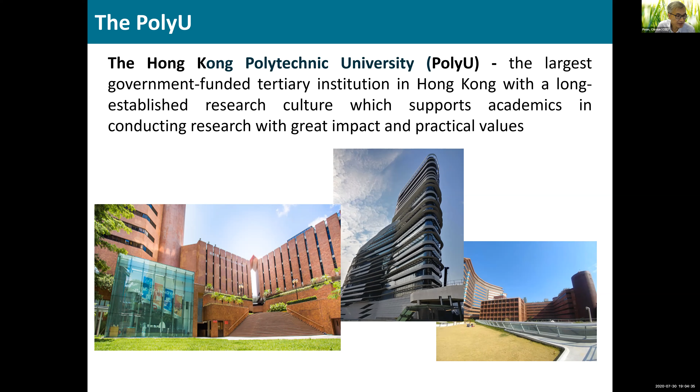Okay, a little bit about my university. We are in the middle part of Hong Kong. Hong Kong is a small place, 7.5 million people, perhaps. It's very crowded. We are right in the middle of the city, and we are one of the government-funded institutions. And in terms of civil engineering, we are ranked number 19 in the world in QS ranking.

So we work on structural engineering, environmental engineering, material, hydraulics, geotechnical, and we have about 45 faculty members in the department and about 200 PhD students and another 200 research or postdoc and things in the department.

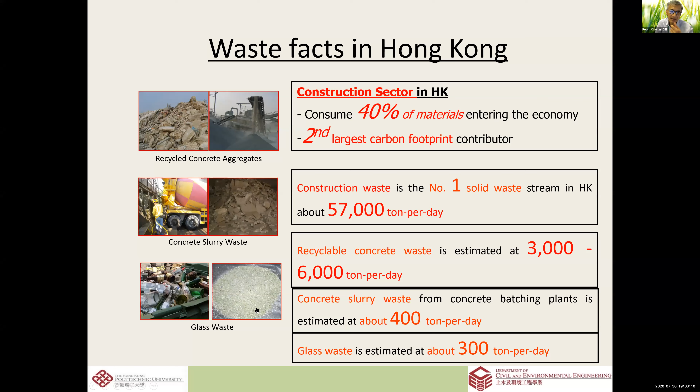The other is glass. People tend to drink a lot of wine and glass-contained beverages, and that is a major problem as well. So C&D waste comes from every part of our activities, roads, which you have. If you are using asphalt, of course it's asphalt. If the pavement is concrete, then there will be concrete waste.

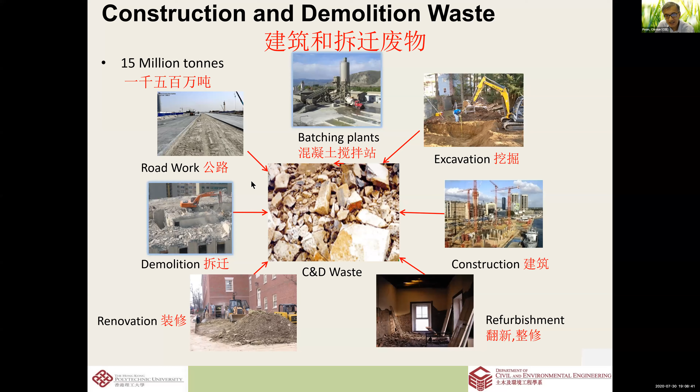And then demolition, as well as construction, excavation, and batching plants produce different categories of C&D waste. And when it's sorted and crushed to different sizes, it can be used for applications like a subbase in roads, for example, or in concrete products.

But of course, C&D waste is very different from natural aggregate because of contaminations like timber or plastic, but also what we call the attached mortar, because in the crushed concrete, besides the natural aggregate inside, there's also the old mortar.

Old mortar means the hydrated cement paste. And this makes the property of what we call recycled aggregate very different from that of the natural aggregate because of this very high water absorption.

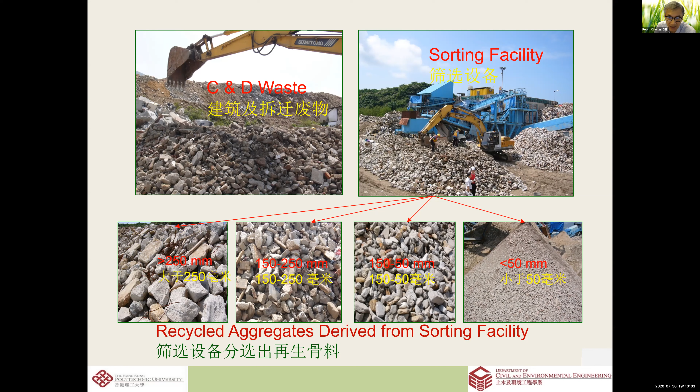For this recycled material, when we have a scarcity of aggregate resources, we can use it. Particularly in our part of the world, we are lacking landfill, and when we dump this in landfill, it is an environmental burden. And also we are running out of aggregates. So recycling is promoted in our part of the world.

The very basic one is to turn this into blocks. Without any treatment, you can crush it to a certain particle size, fulfilling the limits in an ASTM standard, or in Hong Kong we use British Standard, and when you comply with the standard grading curve and the strength of aggregate is strong enough, then you can use it for producing blocks. These are the paving blocks used in walkways, and this is quite easy.

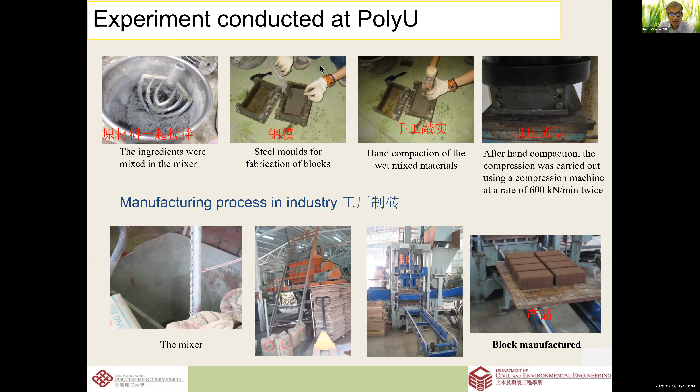But what we try to do is to make it value added, and we have 3 generations, 4 generations now. The first generation tries to use as much recycled aggregate as possible to substitute natural aggregate. This is the most primitive type; as long as it complies with the grading as well as some strength requirement, it can be used.

The second generation, because we are also facing a glass problem. With the use of recycled aggregate in the blocks, although it meets the strength requirement, it increases the water absorption because the recycled aggregate contains a lot of old mortar. Increased water absorption means the blocks easily get dirty, because it takes up a lot of water, so when used in pavement, it takes up a lot of dirt as well.

So we try to also use recycled glass, which is what we call hydrophobic. It does not absorb water, and it also produces some aesthetic effect. Glass itself is shiny under light. And it is strong enough for use as recycled aggregate.

So we made the second generation block to have recycled aggregate and recycled glass together. This contains about 70% of recycled material in it. It lowers the water absorption, making the block more durable in a sense.

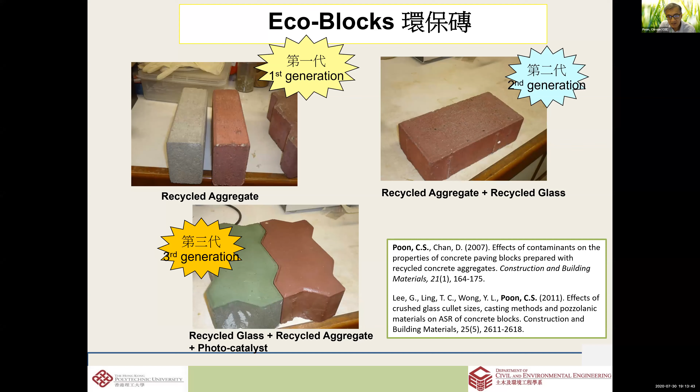The photocatalyst is nano TiO2, and with the photocatalyst it is able to convert NO to NO3, and that reduces certain air pollutants. This is done in the lab and this is done in the factory.

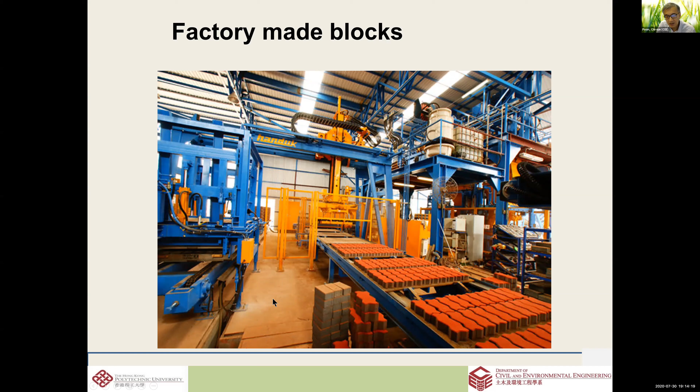We have produced the mix design, we have characterized all the engineering performance of this material, and after a lot of demonstration, the government accepted that and changed the spec, and now all three generations of block are commercially produced in Hong Kong. Of course, the third generation is a little more expensive because of the photocatalysts. These are used very commonly nowadays in Hong Kong.

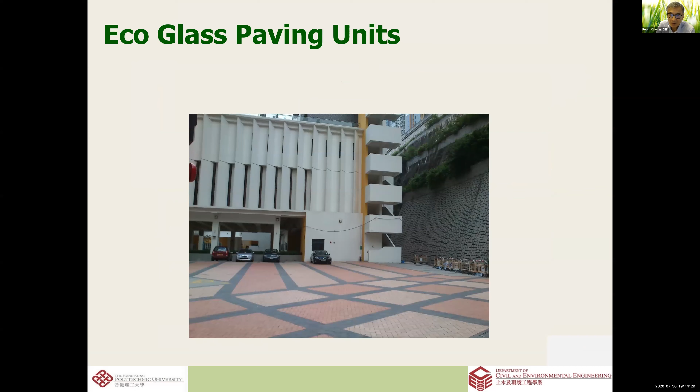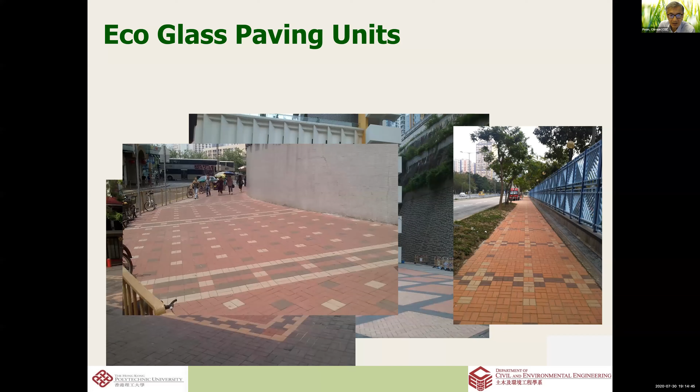So this has the concept of recycled material as well as value added aesthetically with the glass, as well as the photocatalytic reaction with the TiO2. So why do we want TiO2? I think Professor Rosell is also working on TiO2, and it's because of the air pollutants.

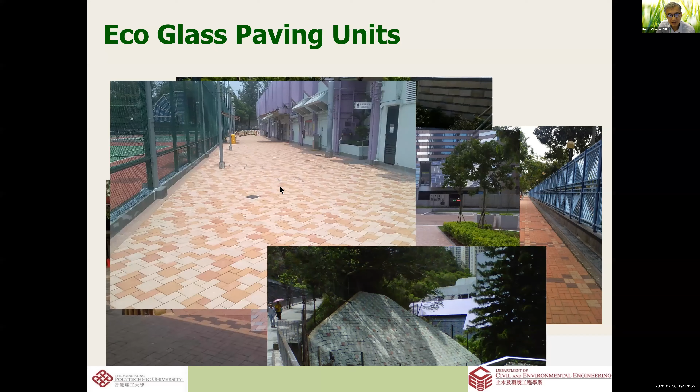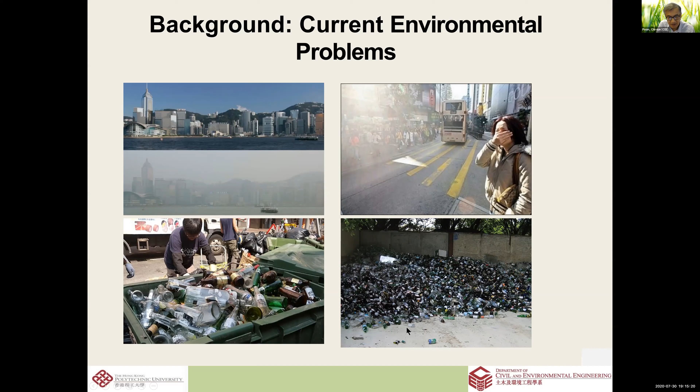This is Hong Kong. It's very beautiful sometimes, but it has nasty days, like this smog. This smog is caused by ozone, and NO partly contributes to it. Hong Kong is very crowded, and with the vehicles, the air pollution is quite severe. So we have the waste glass, as I said. So the concept behind the third generation of eco blocks is that there are two layers.

Base layer, we try to use as much as possible recycled materials, recycled glass and recycled aggregate, to provide the mechanical properties. The strength of this is up to 60 megapascal. This is suitable for use in pavement for vehicular access, and the recycled material content is up to 50 to 60%, and this provides the strength.

Recycled aggregate, of course, has to meet certain criteria, and recycled glass has the concern of ASR, but we have addressed that, as I said. If you're interested, you can go to these publications. But on the surface layer, we put TiO2. TiO2 is a nanoparticle material, and it has the ability to convert, not remove, but convert NO to NO3, and NO3 can be washed away.

In our development, we put glass on the surface layer as well. The glass is 5 mm, particularly clear glass. The glass could allow the penetration of sunlight into the deeper part of the surface. For example, when we have TiO2 only on the very top surface, the area that could be contacted with the air pollutant is quite limited, because some TiO2 is embedded underneath the very top surface.

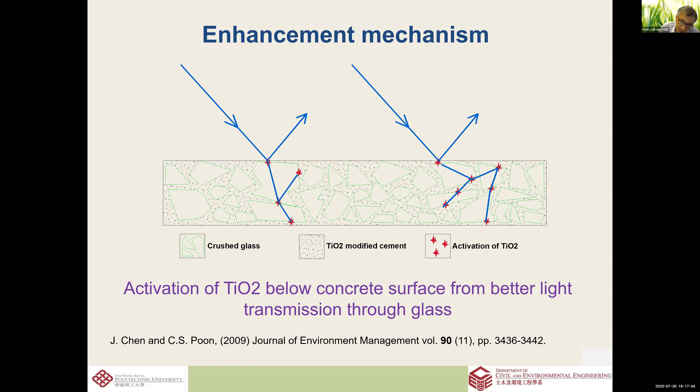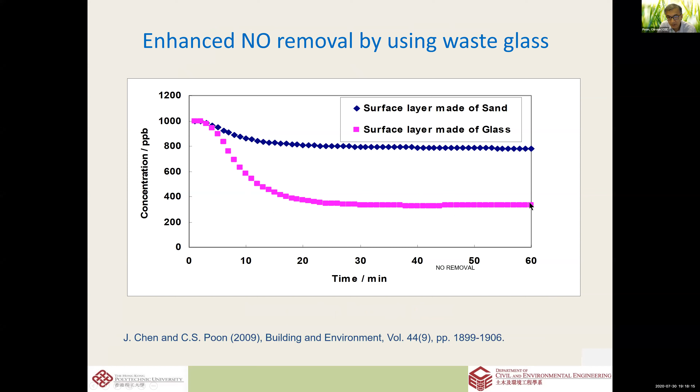So this is to show the surface layer without glass. This is the surface layer made with sand. This is the surface layer made with glass, and that is the photocatalytic removal. This is 1,000 ppb. In laboratory conditions, it's reduced to about 300 ppb. This is 70% removal for this particular sample. So we are very happy with that, and then we tried different types of glass color.

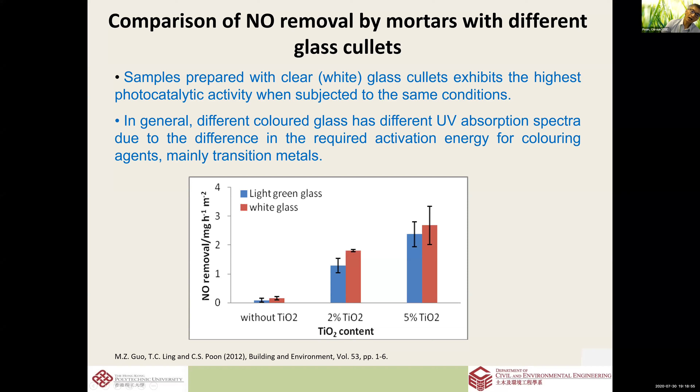As I said, the lighter the color, the better, because it allows better penetration. It will not absorb too much of the UV or the sunlight. Without TiO2, there's no removal. With some TiO2, there's some removal, and different colors of glass on top have different removal ability. So definitely the glass does affect it. The white glass, that means the clear glass, is the best. And this is NO removal.

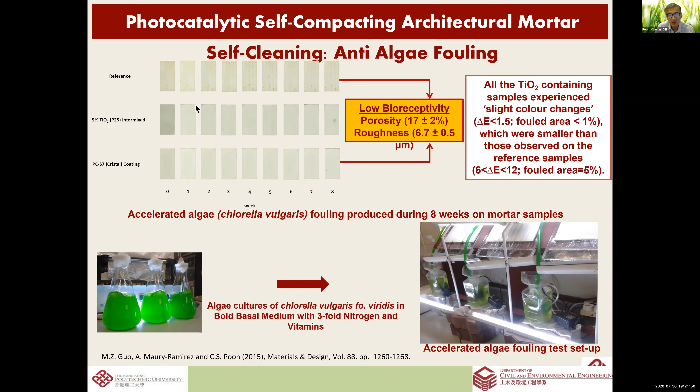And this is the antibacterial property with E. coli. This is in the dark, this is without TiO2, and that is with a particular TiO2 coating that after about 2 hours kills all the bacteria, under certain laboratory conditions. We published this some time ago. E. coli is a bacterium. The virus is not a bacterium, but it may work; nobody knows. So whether it will work, we'll wait and see.

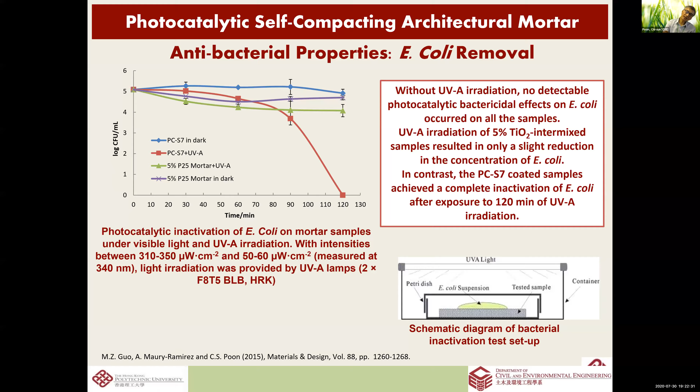So this material is being used in Hong Kong, at a particularly prestigious site in Hong Kong. We call it the Zero Carbon Building. It's a demonstration of the green building concept. It's a model building with photovoltaics. They have a biogas generator inside, and a lot of control on energy efficiency inside.

If you do come to Hong Kong, you are welcome to. You should go there for a look.

And in the foreground they put the eco blocks, the third generation eco blocks, there. So it's quite clean. We also developed different coating methods with TiO2: spray coating, dip coating, and intermix coating, with different efficiency, and the amount of TiO2 ranges from very little to very high, and the efficiency could be quite similar.

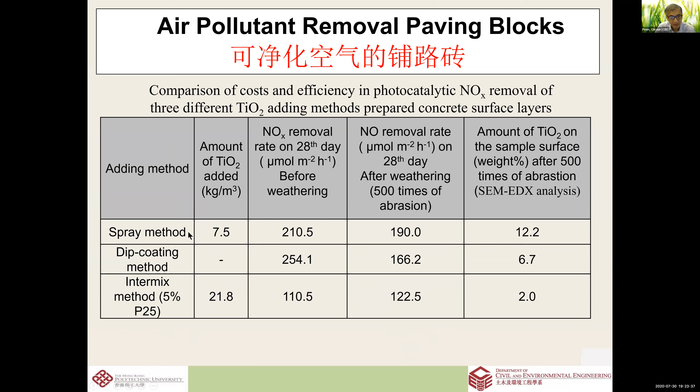So I think we are very happy with this particular method. I think we published this paper as well. If you are interested, you can search for it.

Now, we go back to the main topic of today, which is CO2. Why are we interested in CO2 curing? Because of concrete. If you're a concrete person, you know hardened concrete is hydrated calcium silicate hydrate and calcium hydroxide. It will be carbonated. It carbonates naturally, because CO2 is in the air, and so it will capture CO2.

After carbonation, it will have some pore densification because the CH is converted to CaCO3. There's some increase in strength, increase in mass, as well as reduction in pH. And this reduction in pH is the major concern in corrosion of reinforced concrete, because concrete normally is about 12 to 13.

Normally the pore solution is about 13, 12.8 or something. But after carbonation, the pore solution could be reduced to 9 or 10. So it's not good, and it leads to corrosion of the reinforcing steel. But if you are talking about

crushing this concrete and using it as an aggregate, then the outside binder is still new binder, and we are talking about carbonating the aggregate itself, and this would have little bearing, we think, on the corrosion of the reinforcement bar. There are a number of factors affecting the carbonation.

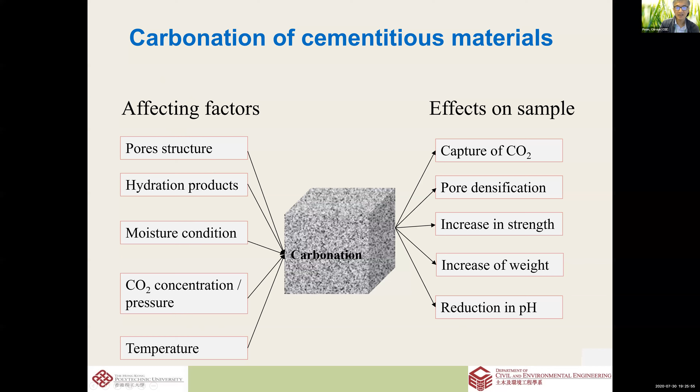There are a number of factors affecting carbonation: the pore structure, hydration product, moisture condition, CO2 concentration, and temperature. And we are very interested in understanding how recycled aggregate can be carbonated, because recycled aggregate, as I said, has inferior properties to natural aggregate because of the attached cement paste or mortar, leading to high water absorption, lower bulk density, and a weaker interfacial transition zone.

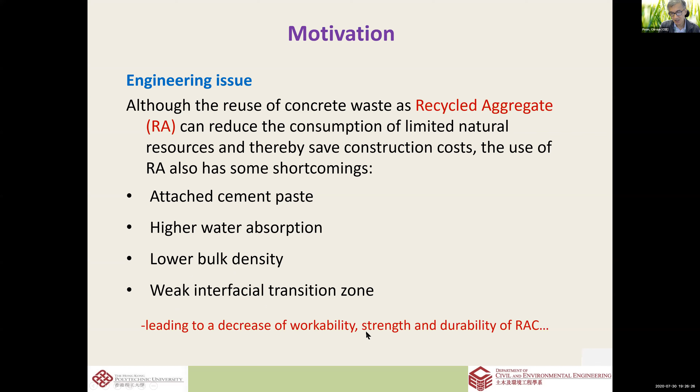And when we make recycled aggregate concrete, the recycled aggregate will lead to poor workability, lower strength and lower durability. So these are some of the results; it's too small for you to see. But it summarizes that using recycled aggregate in new concrete without any modification of the aggregate or the mix design leads to about 10 to 30% lower compressive strength, more than 30% lower modulus, and very poor durability as well.

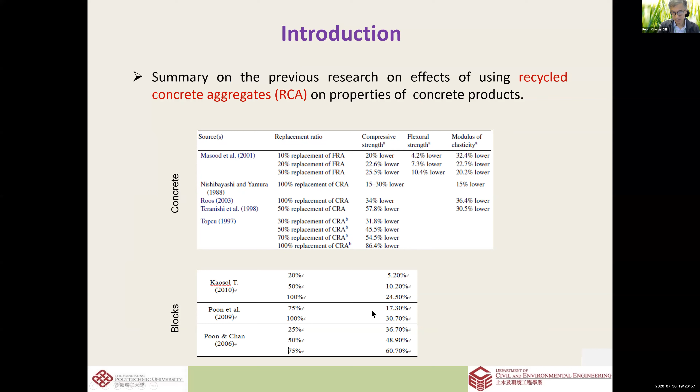So this is the culprit, the bad thing about recycled aggregate. This is the old natural aggregate, and this is a schematic of the old mortar surrounding the old natural aggregate. And this old mortar makes the recycled aggregate poor.

We dissolve it in hydrochloric acid, and before and after immersion you can see before immersion it is coated with the paste or mortar. After immersion, the paste has gone because it's dissolved in the acid. You can see the exposed natural aggregate. This could be a treatment to retrieve the aggregate if we are lacking aggregate, but it is very messy. We have a lot of waste, and it's very high cost.

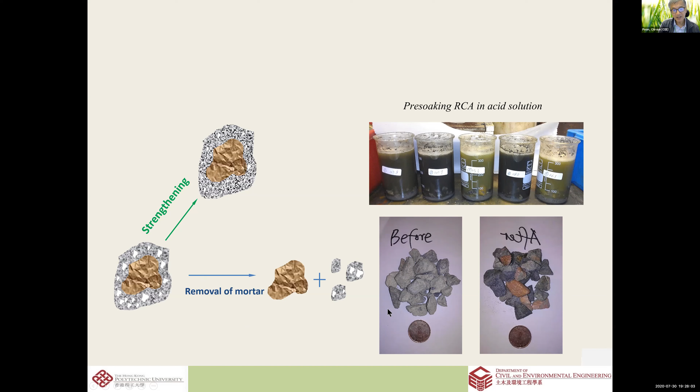So there are a number of methods of removing this mortar: mechanical methods as well as strengthening methods. Removing using grinding, ultrasonic cleansing, or heating. Heating means heat it and cool it. Because of thermal expansion and contraction, the mortar will break due to thermal incompatibility between the natural aggregate and the old mortar.

But what we are trying to do is to strengthen it, by carbonation. Other people, including ourselves, have done strengthening with water glass, strengthening with nanomaterials, but we are particularly interested in strengthening it with carbonation.

This is a summary. If you're interested, you can go to this publication. It summarizes what this method does to the recycled aggregate, showing some improvement, but also some limitations.

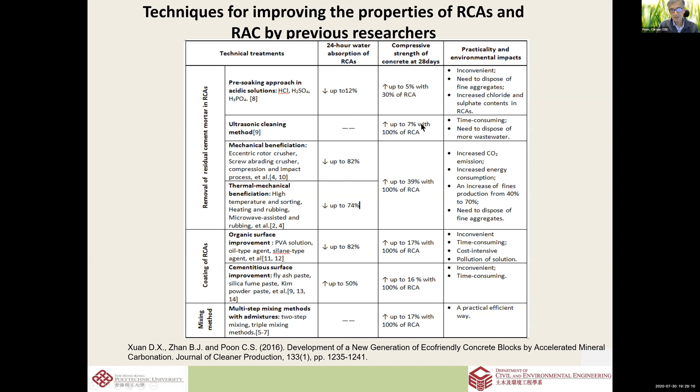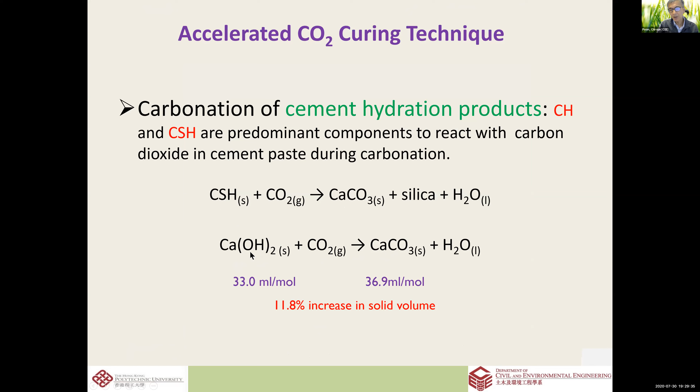So this is the principle: the hydrated cement contains calcium hydroxide, and when it turns to calcite, there's some volume increase. This volume increase leads to densification, and the mineral change from portlandite to calcite leads to hardening as well. So this is not new.

I think this was done 30, 40 years ago by researchers in concrete. They were not working with recycled material, but what they did was carbonate the clinker phases in cement, like C3S, C2S, or beta C2S, which can be carbonated very quickly. The rate of carbonation is much higher than the rate of hydration. Carbonating for a few hours would be equivalent to hydrating for a month, producing strength.

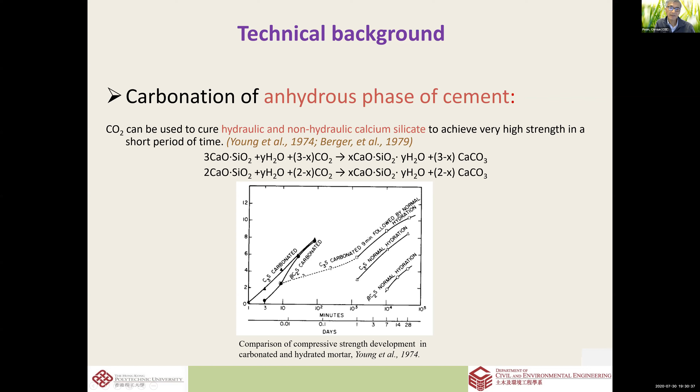So carbonation of the clinker phases is quite well researched, and it produces strength because of the production of calcite as well as calcium silicate hydrates. This has been considered one of the carbon dioxide sequestration techniques.

Mineral carbonation is promoted by the IPCC, the Intergovernmental Panel on Climate Change, and it considers industrial waste, particularly alkaline industrial waste like steel slag, ashes from incineration processes, cement kiln dust, or concrete waste. It contains alkaline material that can be carbonated, and with this carbonation it can be used to capture CO2 as well as produce a value-added product for other uses like recycled aggregates.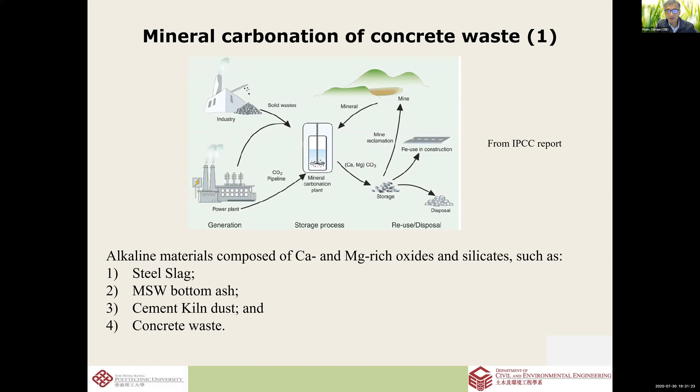So there are some means of carbon capture, right? There's carbon capture in brine, excavations or pumped into the sea for sea storage, and also deep ground storage, but these are not leak proof. This is quite a worry.

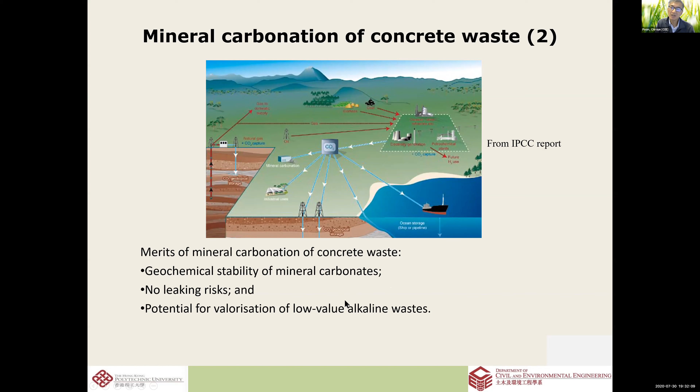But when we carbonate it, it becomes a very geochemically stable mineral carbonate. It would have no leakage because it's a new mineral, very stable. So we have CO2 all around us.

Although some in the U.S. don't believe in climate change, we do believe it in our part of the world, and we are very much concerned with the emission of CO2 from power plants, landfills, and cement plants, which produce a lot of CO2. If we can capture some of it, remove some of it, or build a recycle plant next to these carbon sources, we can utilize the emission of CO2 to capture it as well as to carbonate the product.

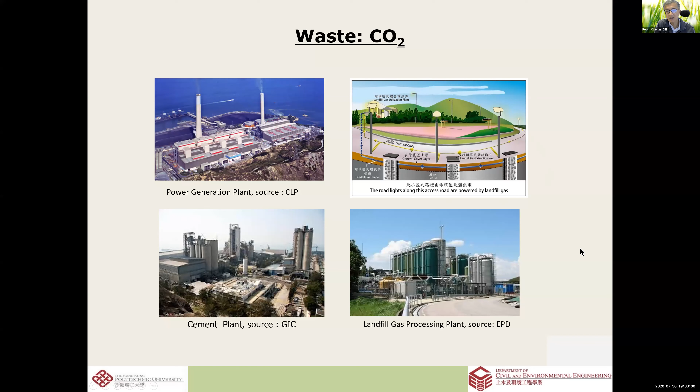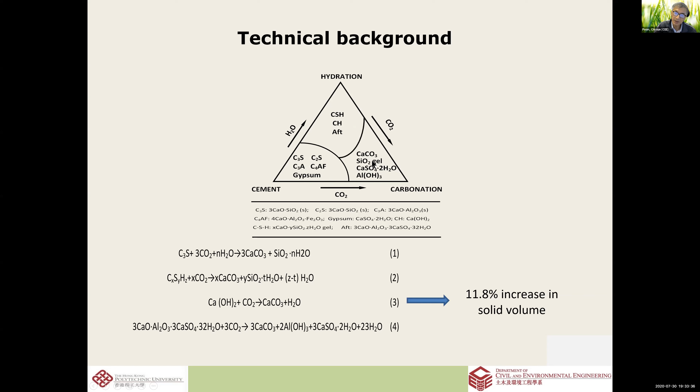With the unhydrated phases in the recycled aggregate, there are still unhydrated C2S, for example, which can still be carbonated into these very stable mineral phases. So that is the principle behind it.

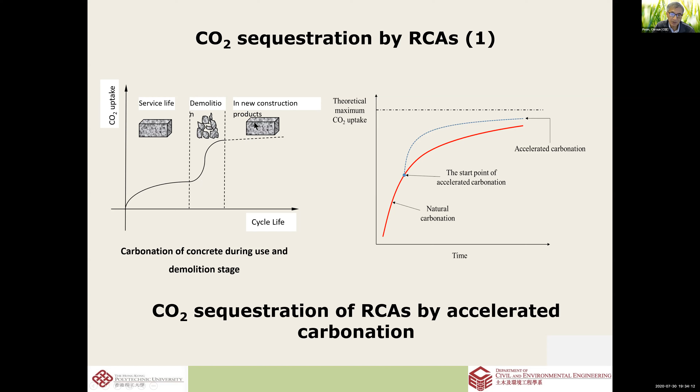This illustrates that carbonation occurs naturally, but when we crush the surface layer of concrete during demolition, the surface area becomes much larger because of the exposed area after crushing. Then when we try to accelerate the carbonation through an artificial, accelerated CO2 carbonation process, we can produce new product and capture more CO2.

So what we try to do in our lab is use accelerated carbonation processes. Of course, in our lab, we first use 100% CO2 from a cylinder, and then we carbonate it using different pressures and also under atmospheric pressure, like a flow-through process.

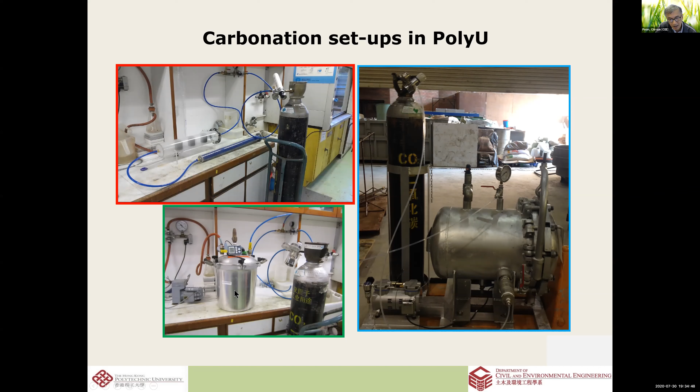This is the material, and this is the material, and then flow through the CO2. This is a low pressure vessel. This is the high pressure vessel.

So what we try to do is artificially produce some recycled aggregates. After a lot of laboratory work, we produced a large batch of concrete from a batching plant, then demolished it in a recycle plant, and collected this recycled material to the lab. We call this a new RCA - it's 6 months old. There's also an old RCA, which is demolished concrete received from a real demolition site, crushed, and collected to our lab.

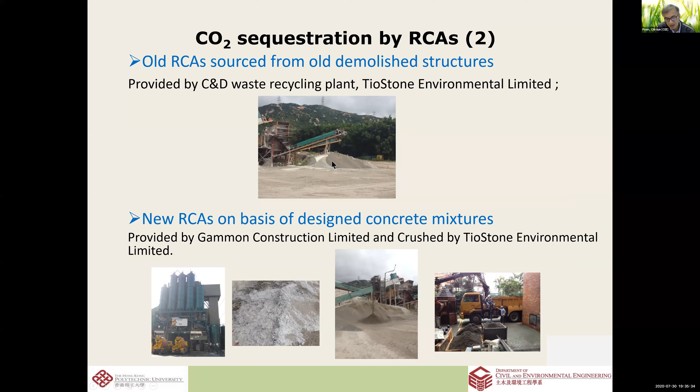Then we try to find out the optimum carbonation conditions, because there are a number of factors affecting carbonation: the humidity, the time, the particle size - the smaller the better - and the time, the longer the better. The humidity needs to be in a middle range, because you need CO2 and moisture to help the carbonation chemical reaction, but if it's saturated it won't allow CO2 to diffuse in. There's also CO2 concentration.

We found that a certain time, maybe 1 day or even less, is enough, because the carbonation reaction goes through a slowing down process.

Also the CO2 concentration - there's 100%, about 10%, and 0%. We found 10% is good enough already. In real flue gas, off-gas from a power plant for example, it's about 20% CO2. Pressure-wise, some pressure is good, but without pressure is okay too - we think even under atmospheric pressure is fine.

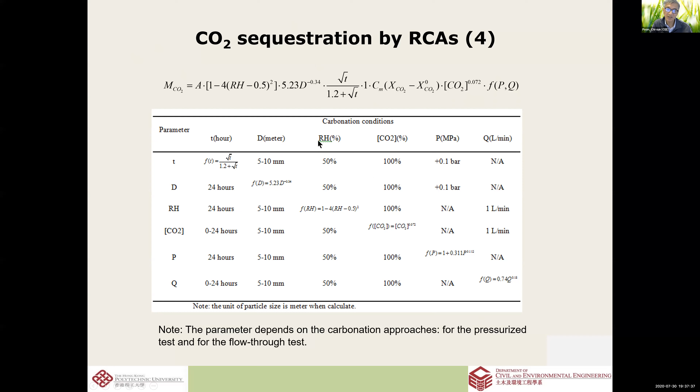After this, we provide some empirical models for predicting carbonation, given the particle size and CO2 concentration, we can predict the carbonation efficiency of certain processes, which would be helpful for industrial processes. These are the empirical formulas we developed, with some empirical constants related to carbonation efficiency for different parameters like RH and CO2 concentration.

This comes back to our recycled aggregate. We consider, for example, the new one being 6 months old. Without carbonation, the water absorption is very high compared to natural aggregate, which is about 2%. For the new recycled aggregate, it's about 7%.

After carbonation, the water absorption will reduce by a certain percentage, about 10%. At higher pressure - this is 0.1 bar, this is 5 bar - there's some improvement in water absorption demonstrated. The 10% value is like the crushing value, but reversed. With carbonation, there's improvement in the strength of the aggregate, and there's CO2 uptake after carbonation.

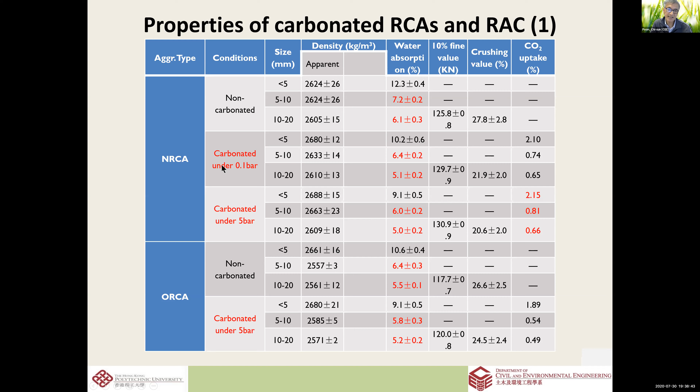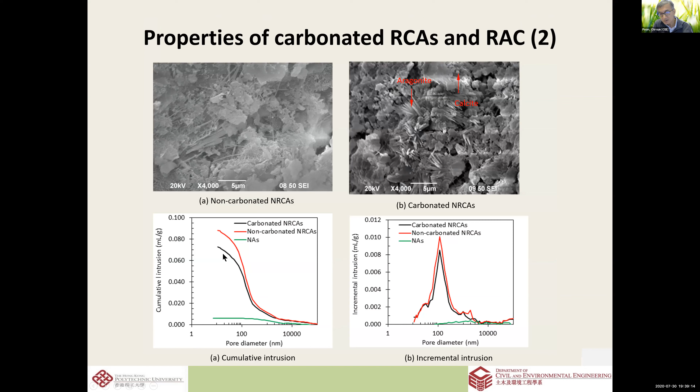This is before carbonation - we can see a lot of normal hydrated phases: calcium silicate, calcium hydroxide, AFT, the ettringite phase, calcium silicate hydrate. After carbonation, we see calcium carbonate phases like calcite, and aragonite is another crystal phase of calcium carbonate. The pore structure has also changed - this is natural aggregate, this is uncarbonated, this is carbonated. The pore structure is densified with carbonation.

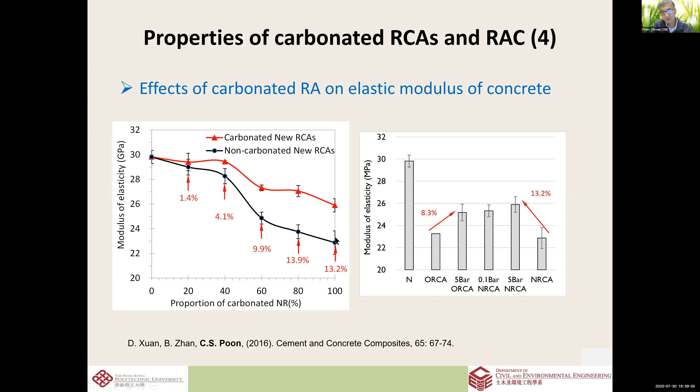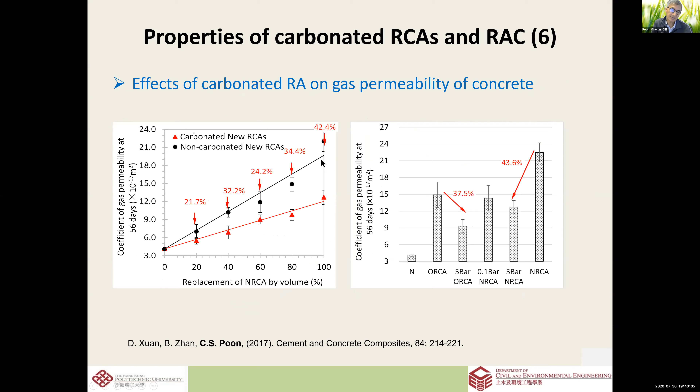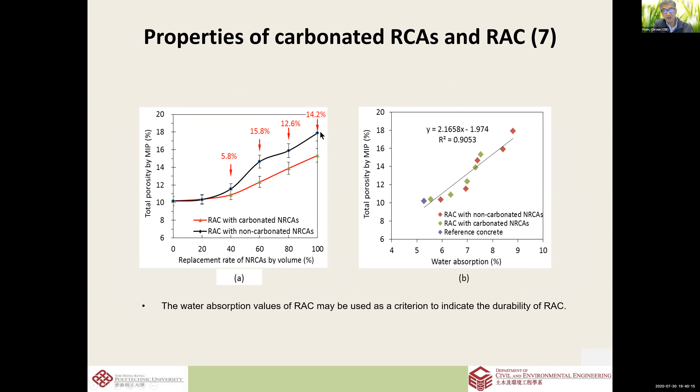For durability, the chloride diffusion shows about 35% improvement. Gas permeability shows about 42% improvement as well. For porosity of the new concrete, there's about 14% improvement as well.

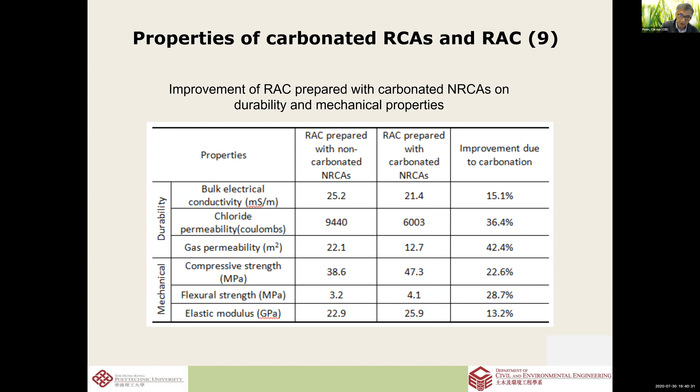So in summary, with the use of recycled or carbonated aggregate, we can have improvement in strength and improvement in durability particularly. This is of particular interest, and it's quite a highly cited material.

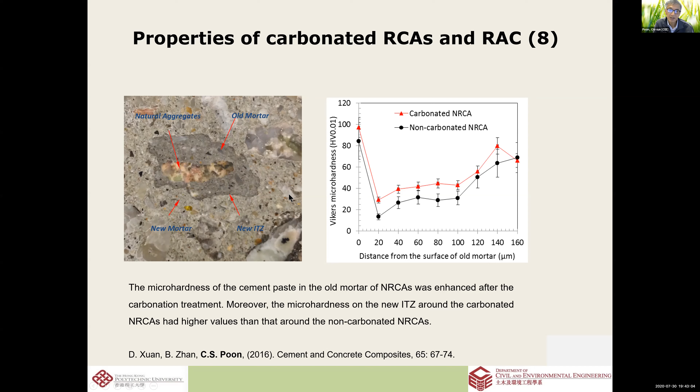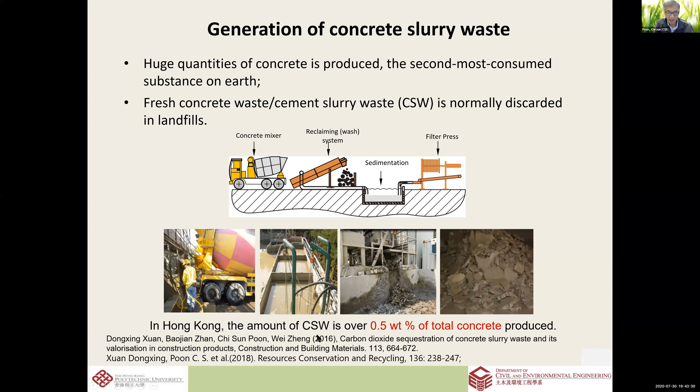So lastly, I want to talk about this slurry waste. As I said, producing new concrete from recycled aggregate, after reclaiming the old aggregate, there's this waste. I think this is everywhere, even in the US, because no matter what, you have some wastage. We've analyzed this waste.

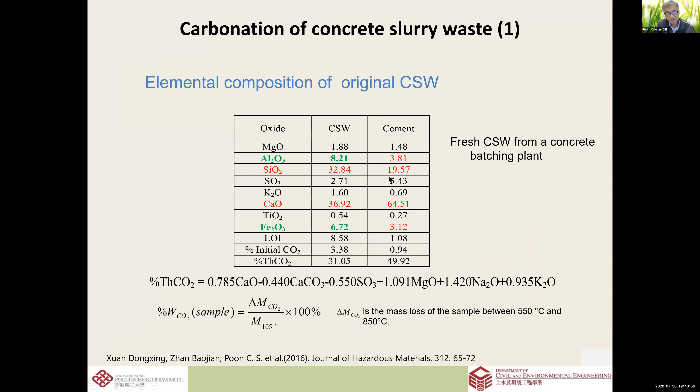This concrete slurry waste, CSW, is not quite similar to cement. It contains a lot of silicon dioxide, similar to what's found in PFA, and silica fume, higher than that of cement. The aluminum oxide and iron oxide content is also higher than that of cement.

But it can be carbonated. This concrete slurry waste can actually be carbonated, and when we carbonate it, it takes up about 10-15% CO2 in terms of cement mass. This shows the change in pH value after carbonation, and the change in microstructure.

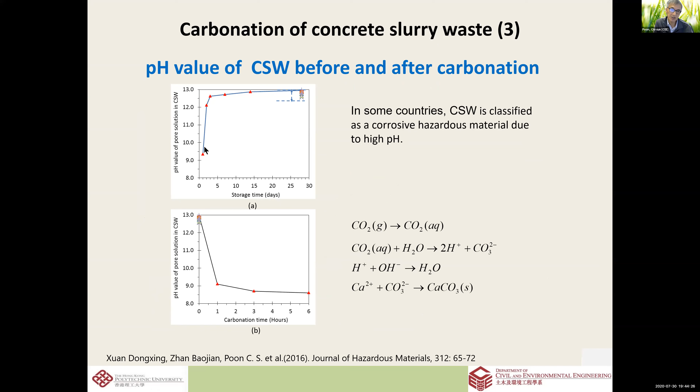But what we try to do is make it into a truly eco-friendly material using the fresh waste. This waste, although it's cement with a lot of water and also some very fine sand, after 2 to 3 days it's still workable. Although it forms a lump after 2 days when we mix it, because of its very high water content, it's still workable.

When you mix it with recycled material like recycled aggregate fines, to produce a block, and then carbonate it, we can produce strength. After a few hours of carbonation, the strength is already good enough for shipment, rather than having to wait for a few days.

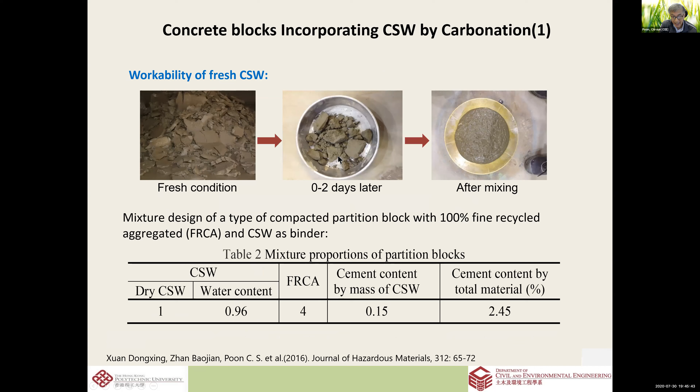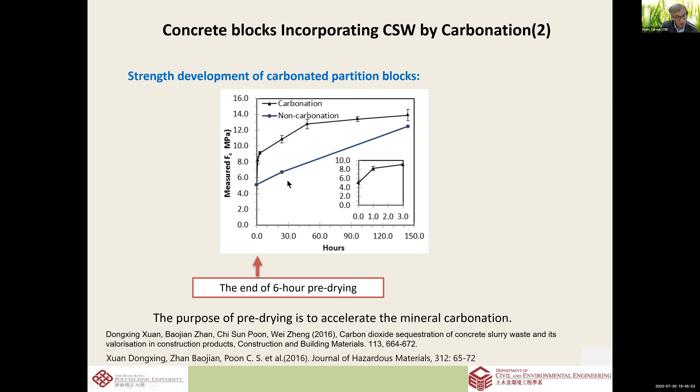In this particular mix, we are using the recycled concrete slurry waste as the binder, and recycled aggregate fines as the aggregate, trying to produce a material by carbonating it. The carbonation reaction produces strength very fast, and within 6 hours it can be delivered.

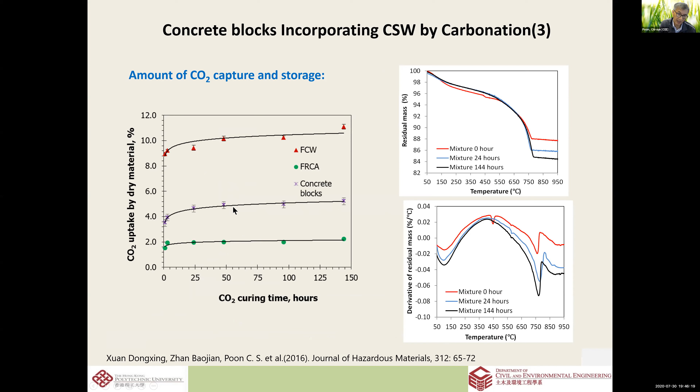This could also take up about 10% CO2. This is the CO2 uptake by the concrete slurry waste itself, but after mixing with the recycled aggregate, it also takes up CO2, though the uptake is less - still about 5% CO2.

So not only does it have good strength and use waste material, it can also reduce shrinkage, because shrinkage is caused by dehydration of CSH. But the CSH is converted to some sort of carbonate - not all of it, but some - and the shrinkage is much reduced.

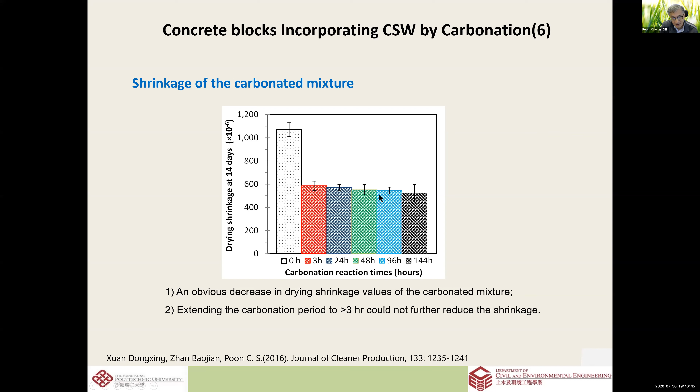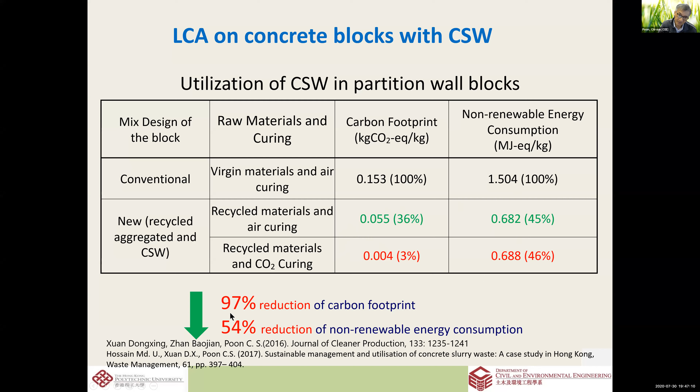We also did a life cycle analysis of it, comparing to a conventional block, or partition block, which we can make use of it for. There's the conventional carbon footprint and energy consumption, and with this material and production process, we can reduce about 97% of carbon footprint and also 50% of energy. So I hope this works.

You have some? Yeah. It takes about 30 seconds.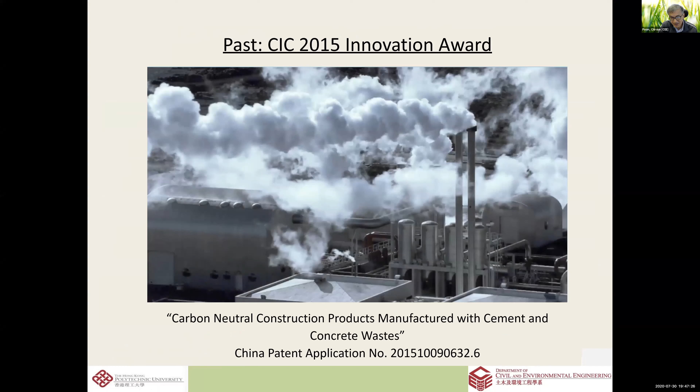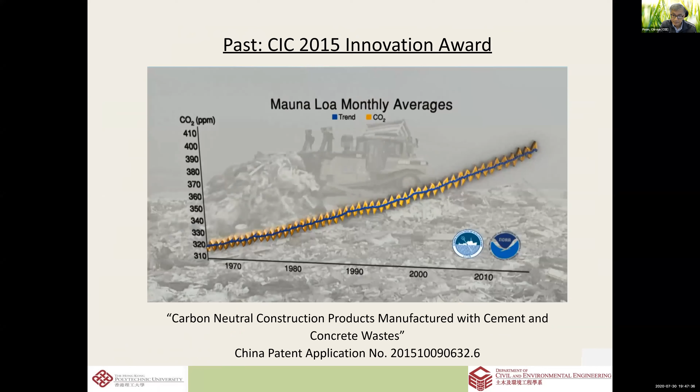In our atmosphere, the concentration of CO2 due to human activity has significantly increased in the past 50 years, which is the most important cause of global warming. In Hong Kong, an ambitious target has been set to reduce more than 50% greenhouse gas emission by 2020 at the 2005 level. The Hong Kong construction industry, as the second largest economic sector, is proactively looking for improvement opportunities at the frontier of sustainable development.

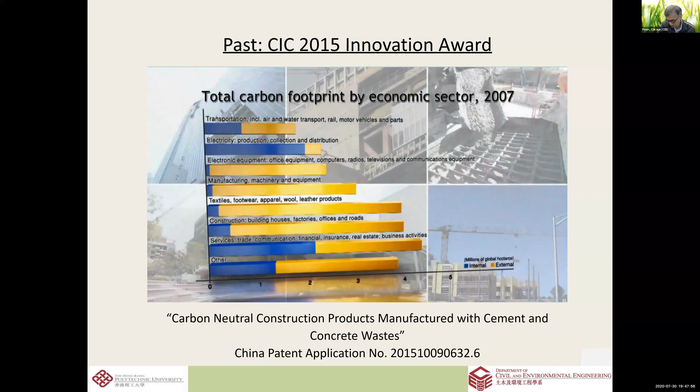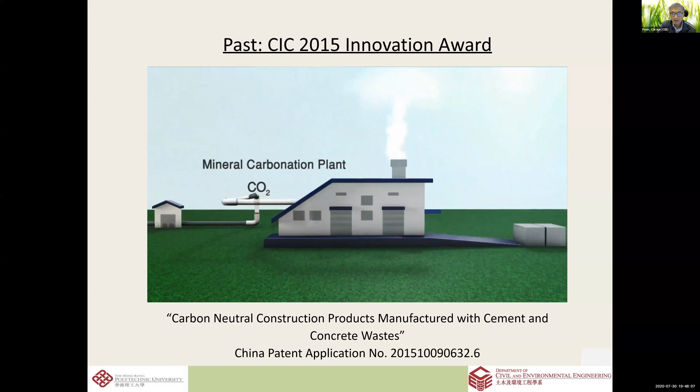By curing mixtures of both fresh and old concrete waste with a waste CO2 source, a new technology has been developed to produce carbon-neutral concrete products. In concrete batching plants, aggregate and water reclaimers are normally used to recycle coarse aggregates, sand, water, and cement slurry waste from production wastes. After all, the cement slurry waste is disposed to landfill as there is no other effective way of reusing it. A research team consisting of academics and engineers has therefore been established to explore ways of reusing the cement slurry waste.

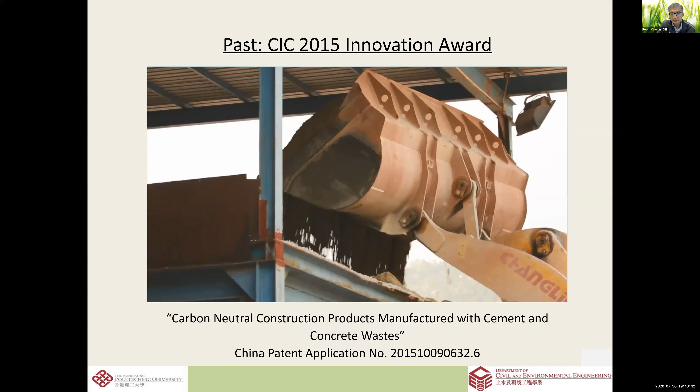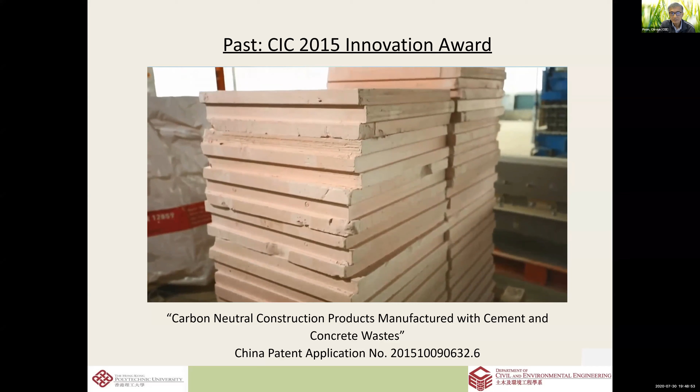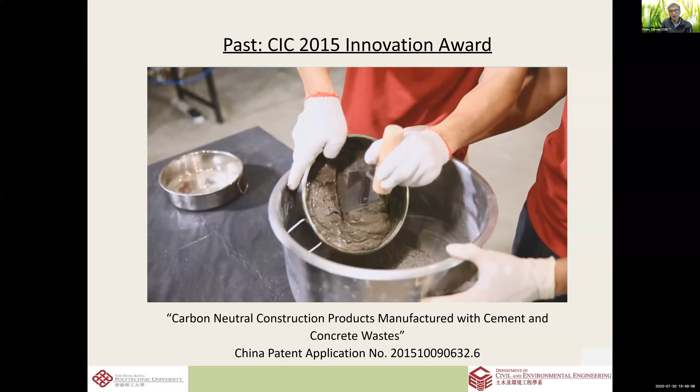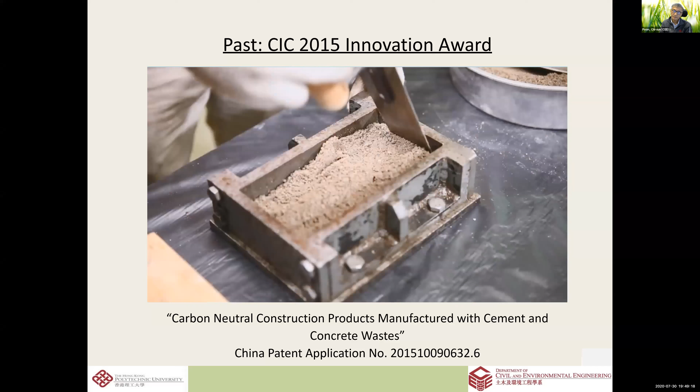More than 5 years' efforts devoted by the team have eventually brought the birth of carbon-neutral concrete products, for instance, dry partition wall blocks, which not only are made from waste, but also cured by waste CO2. In the PolyU lab, the fresh cement slurry waste from concrete plants is firstly processed to a calcium and silicate-rich slurry paste. Then, the paste is mixed with fine aggregates produced by recycled fresh or old concrete in proportions determined upon required concrete performance. The mixture can be further fabricated into better quality dry wall blocks at optimized CO2 concentrations for a few hours identified by the research team.

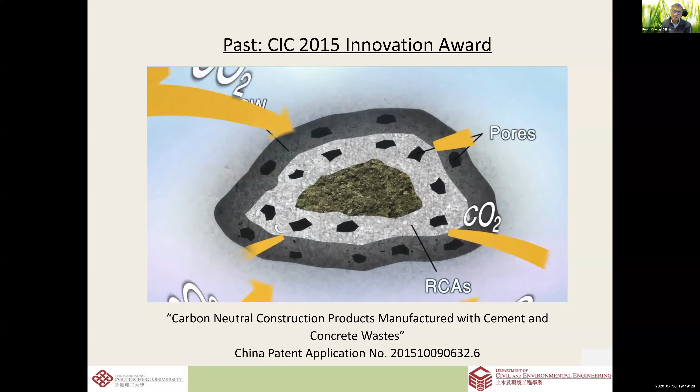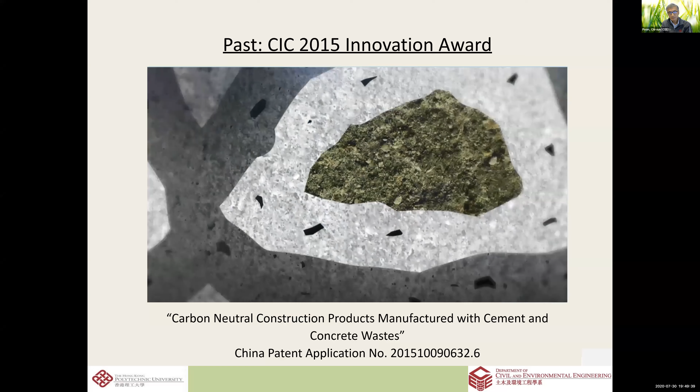The fresh cement slurry previously dumped to landfills is now turned into a concrete product that captures CO2 at a rate of more than 0.11 kilogram per kilogram from CO2 emission sources such as cement plants, power plants, and landfill sites. This innovation does not only completely eliminate waste associated with concrete production, but also brings truly neutral carbon footprint concrete products to the construction industry.

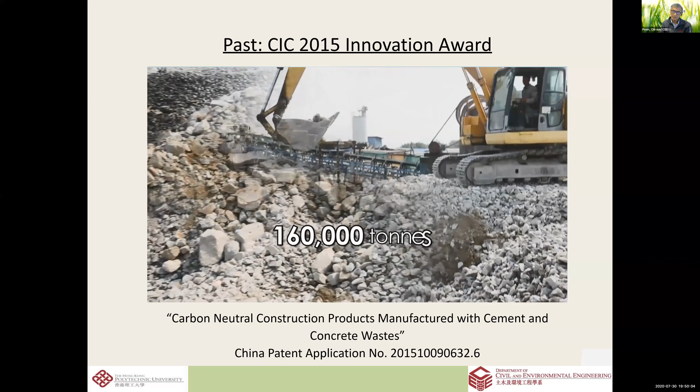Pilot industrial applications of our innovation are on the way. When fully utilized, savings of 160,000 tons inert waste, 8,000 tons greenhouse gas emission, 80,000 cubic meters disposal at landfill, and 20 million Hong Kong dollars waste management cost per annum can be expected.